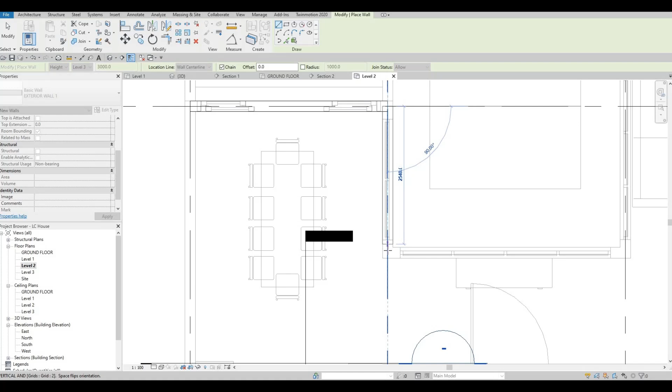And then we're going to have it all cross out right here as well. It's very easy because we're basically mimicking what we have below right now. The difference between this one is what are we going to do after we add this, because we're going to extend some of this, since we're going to add balconies in front of here.

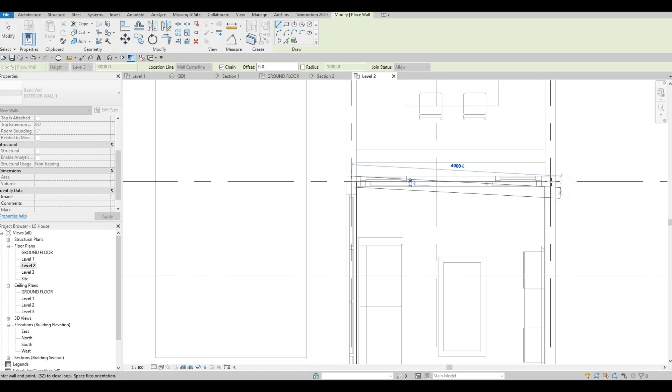So we're going to add it there, and then all the way to F5 right here. So we have our stairs right here. We're going to have it all around right here. The only difference is that once we go to F4 right here...

We need to just pull it up and type in 780. Once we do 780, we need to move this one to number 3 grid line. So basically we need some space right here.

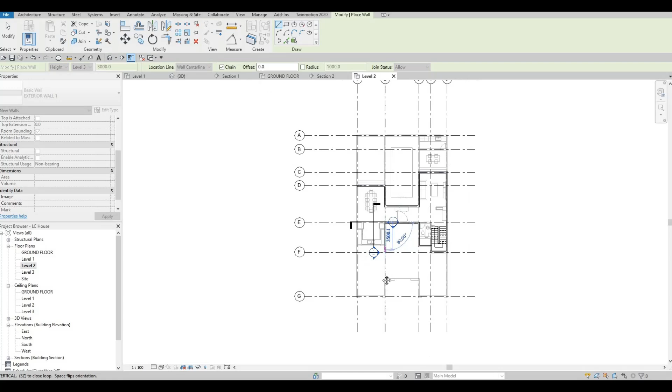And then we need to go back again right here, mimicking what we have below. So that's E3, and then going back again right here, mimicking below. And for this one, we need to go all the way to F2, then we need F1, and then here closing off to D1 again.

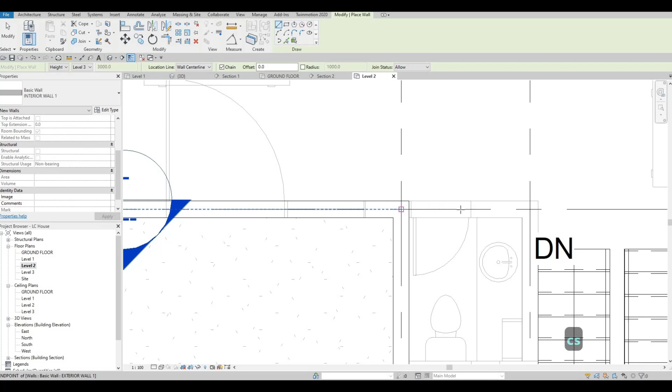So now what we're going to do is add an interior wall similar to this. We could select that below, CS, and then connect it as well right here to cover off the stairs. So here we have it, I believe right here.

So now we have, this will be a washroom, full-blown washroom. That's why we extended it a little bit, but at the same time we cover this one, and then we have a stair right here.

Again, we're going to CS on this, and then extend this one. So let's go from this endpoint to right here, this will be our master's bedroom. This will be another bedroom right here.

But at the same time, what we're going to do is add in a door right here. I'm estimating right now around 1,000 from here. So I'm going to put in 1,000 and then add it there.

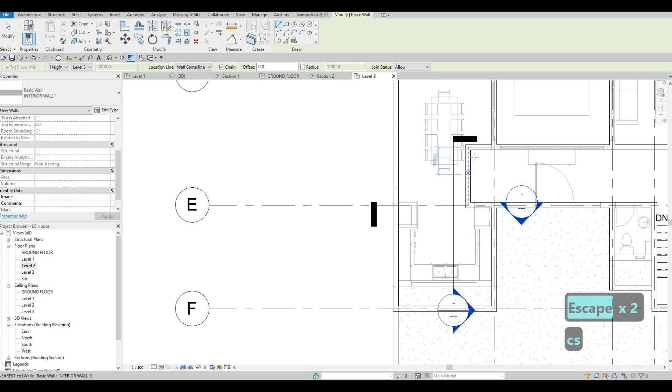Here as well, go 1,000 and add it there, and then we're going to connect them. After that, we're going to add the same one in the midpoint. So now we're basically indenting this so that it's easier for us to add in the door.

Actually, instead of 1,000, let's do 1,100. So why not add 1,100? Then here we have the door opening right here, and at least we will be able to use this area to add in our closet. So that's how it differs on that.

At the same time, now that we're adding all this stuff, why not add the toilet right here as well? So CS on that, and then add it right about here. So anything that we could add it now, even the door, so that we don't look for the other doors anymore.

So CS, we could add the door right here. Even though it's 700, we could change that to 800 or 900. But you want to maintain the 2,000.

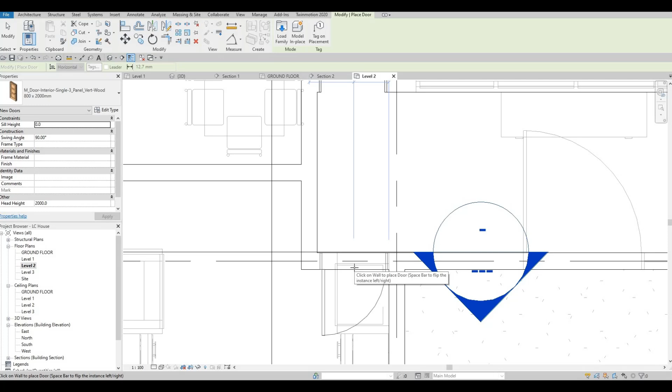So spacebar right there, and then here we could do spacebar and add it on that side. And then move this one on the other side, and then spacebar on that. So we added those stuff right there, and I believe we're good enough on this space that we don't need it anymore.

So what I'm gonna do is turn off the underlay by putting this to none and leaving it like that. So now everything makes sense. Here, CS, we're going to put this one to 700 again, similar to below, and then add it on this side.

And then after that, we're going to add the exterior wall again right here, and we're going to convert this to interior wall. So what I'm planning to do is we have the D here, and this one is just 500, so CS on that, just 500 from the top. This is what we're going to add in order to create a washroom and a walk-in closet for our master's bedroom.

So now add this wall right here. We could basically move this back right there, and then change this to interior wall, and then from interior wall CS again, and then just connect them all together again.

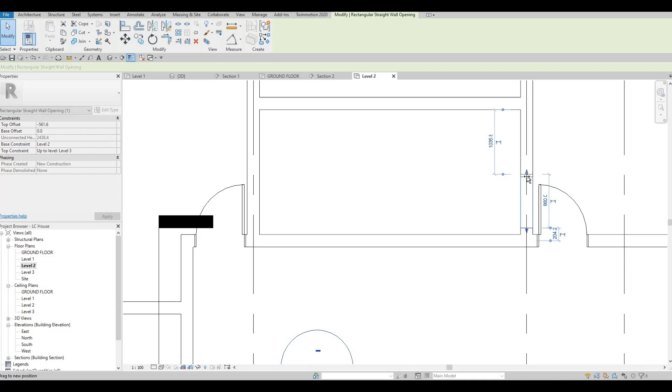And this one, it's easy to change. As you can see, you can just grab that or put in the required dimension that you want. So it's really up to you depending on the space and how you change it. It's just basically an opening for our wall, but there is still a wall there.

And now what I'm gonna do is I'm going to also add another wall inside to separate the walk-in closet from our ensuite.

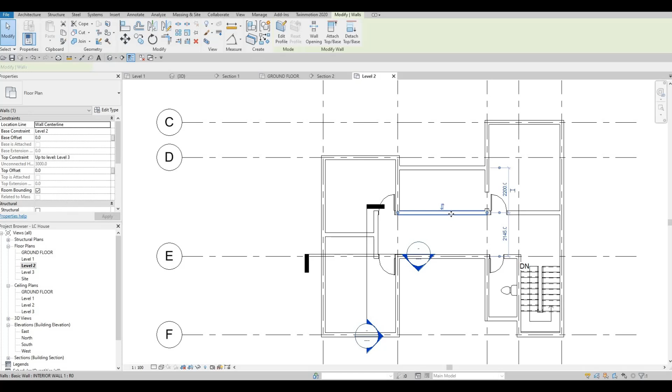So I'm going to select this wall, CS on this, and then this will be, I'm going to add it first, and then I'm going to dimension it from here. It should be around 2930. So that is the space that I needed.

So I'm going to select this one, CS, add it right here. Oh sorry, so add it right there, delete this one, and then this door, CS again, and add the door right here. But we're going to change it to 700 because that's the size of the door that we want for our washroom.

So now I'm just adding that. Hopefully you guys are envisioning what we're trying to do here. I want my toilet to have a separation, so I'm gonna add in a small wall, probably 100 thickness.

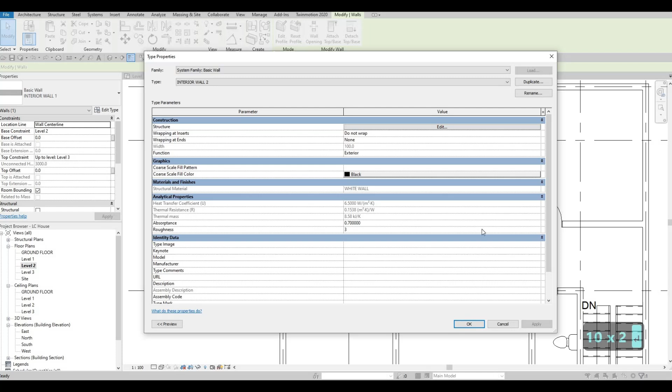So select that, edit type, duplicate. This will be wall, interior wall number 2, and then just change the thickness to 100. And at the same time, I'm just going to add it right here.

So change this one to, so I'm just gonna add that right here first, and then change this back to number 1. So just my sequence messed up there, but that's good enough.

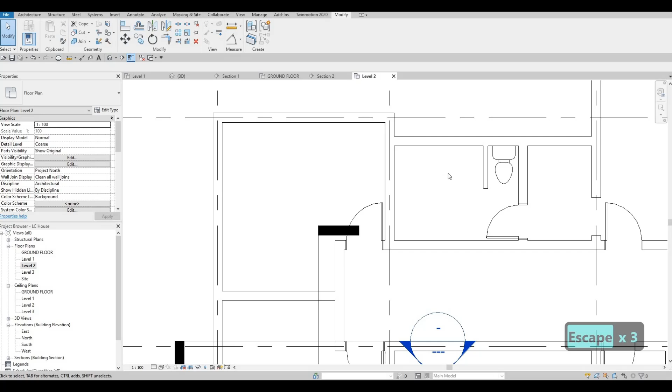And then here I'm planning to add a freestanding tub. So that will be very nice to have a freestanding tub, and I'm planning to make this one nice. And just because it's ensuite, double sink here, I'm planning to add a double sink as well. I think that will look nice to have a double sink. And then let's add in the same design that we have probably.

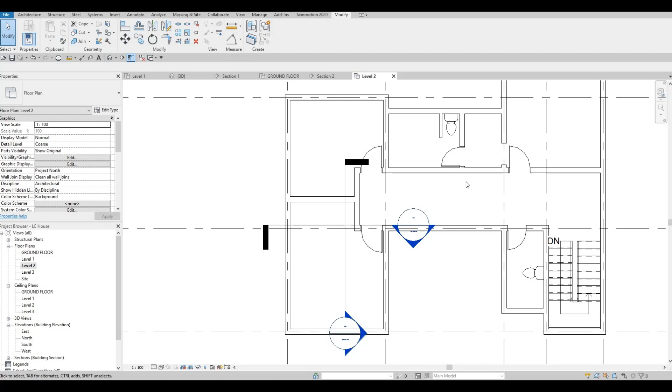So in order for us to see it much better, I'm planning to insert the bed. So let's go to insert, load family, and go back to furniture. Go to the main and look for furniture. And then we have beds here, and I usually just use this one. Click on open, CM, and then we have the bed right here, but we're going to change it to queen.

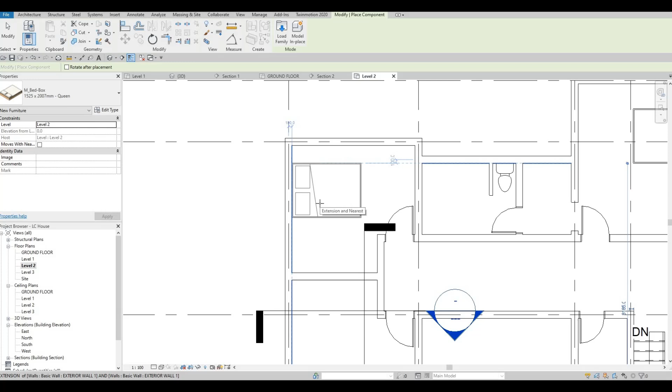So that's why I go to the drop down, and then let's add the bed like so. And then I'm just trying to add it properly and then spacing out. So this part, this will be the extra room that we have right here. I'm still thinking because we extended it too much. Maybe we could extend this one so that it's not too much of a burden for this space right here.

I'm just trying to extend a little bit of this space right here. So why not delete this first, move this back, and what I'm gonna do is select this exterior or interior wall, CS. I'm going to add it right here so that it's not too much, because I'm seeing that it's just gonna get too much space right here. So I'm gonna trim this, and then we could just extend this one right there.

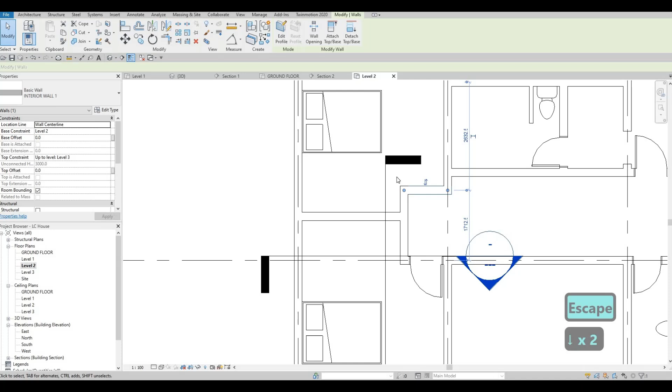That small gap here, as you can see, is giving us more space here for the closet. So I'm just adding that in order to make this one a lot better in terms of look. And then this one should be placed in the middle. I'm gonna delete that first and then add it again with the midpoint there, right there. So now they have a balance because we have more room right here, as you can see, for the closet, and then at least we've given them enough space.

And then this one will be closet. I'm gonna use this one to show as a closet. So what I do is I add it first because this is a different size or thickness. What I do is align it, AL, align it there. I'm gonna align it here as well, and then now we could just join them all together. It's a lot faster than doing something else.

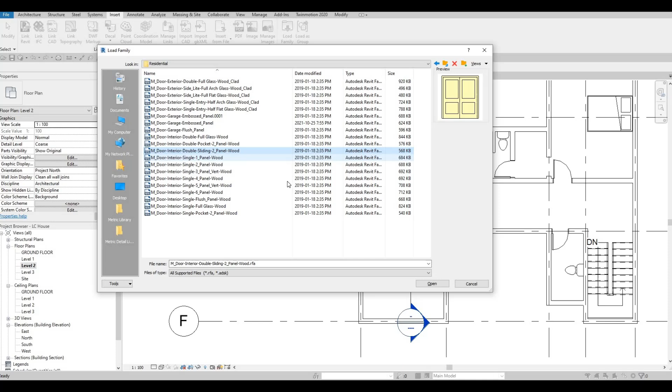So now we just need to insert as well some doors. So go back to the main and click on doors, and then for sure we have some sliding door right here that we used before. So here I'm gonna use sliding door right there. I'm gonna load everything because I want all the variation that we could have, and then type in DR. The smallest one is the one that is appearing right now. Maybe we could put the 1700 first. 1700 is good enough, and then let's just add it right there.

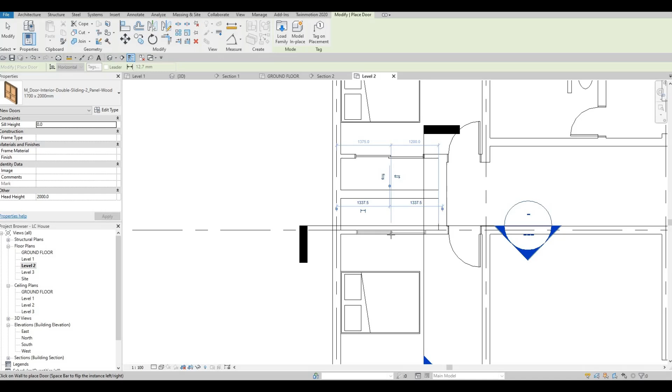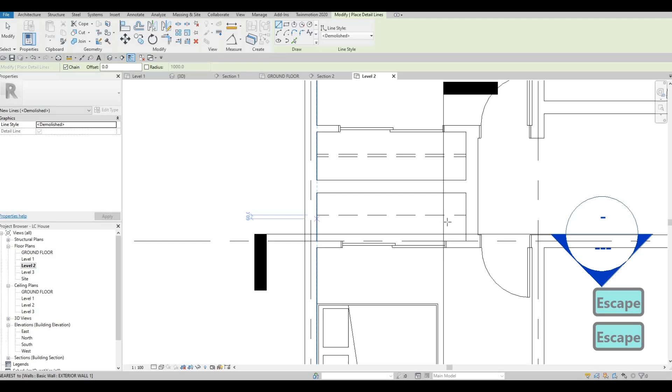To showcase the rod, we need annotation, and then we need the demolish line because we don't have dash line at the moment here. And then just add that demolish line to represent the rod, and then the shelvings as well. And then here we could have an entertainment system, like TV and whatnot, and then we could have this one as well right here. So that will look nice.

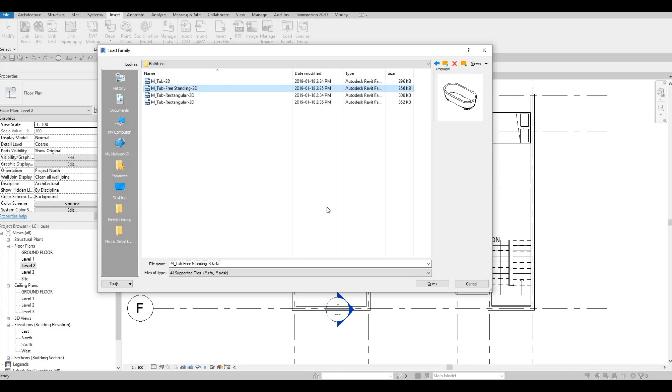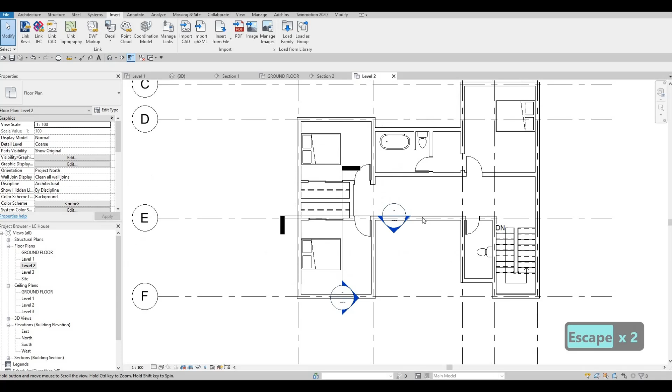In terms of the tub and then the sink right here, what I'm gonna do is I'm going to insert the tub first so that everything looks proper here. Plumbing, architecture, fixture, we have bathtub, we have freestanding here, so let's add that first. CM, and then that looks perfect right there. And what I'm planning to do is give it some nice window right here so that it's overlooking, and obviously there's gonna be some privacy there, and then we're going to have a nice window here as well. So I'm planning to add a nice window here.

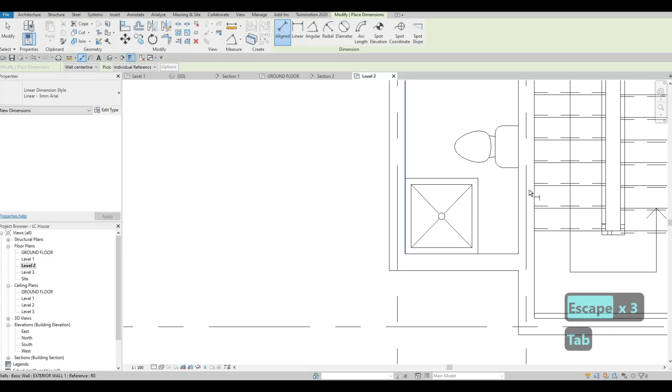And then in terms of the shower, we're just going to use this shower for now. We're just using this one anyway, so we're going to add this one. Click on dimension to know the dimension of the inside right here, 1420, and then edit this one. You can duplicate it if you want to, and then 1420 on one of them.

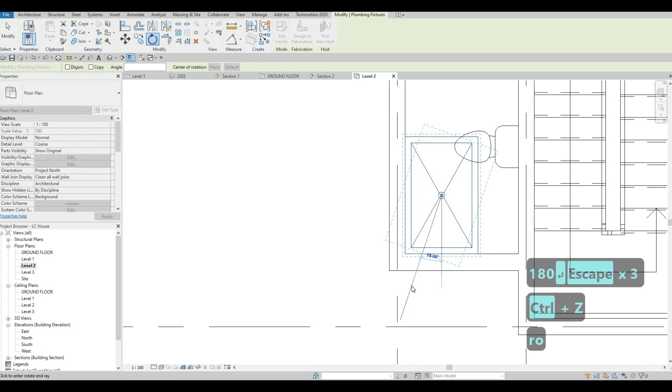Maybe it's the width or the, so depending on that, you could just rotate this one 90 degrees, not 180. And then after that, you could just grab it, move it, MV, and then move it from the corner. So that will be perfectly fit there.

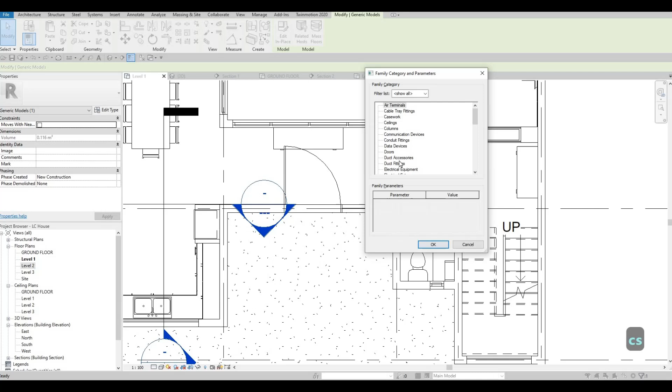And then the sink, because we did the sink right here, as you can know, we have our extrusion. If we see that, basically this right here is not an annotation, but we really built this. It's up to us if we want to add the same thing right here or change it a little bit. But knowing that I showed it to you, why not just add the detail line?

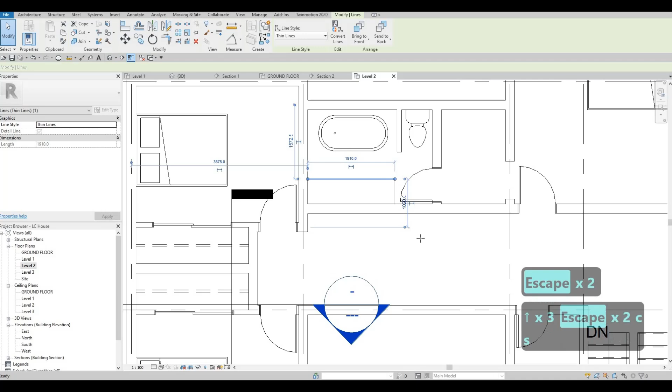So we're gonna use thin line just to represent the top there. Not the line, but thin line is much better. And then obviously that's too much. We could just change it like that, eyeball it, and then add in the sink, the same sink that we have below, to represent that.

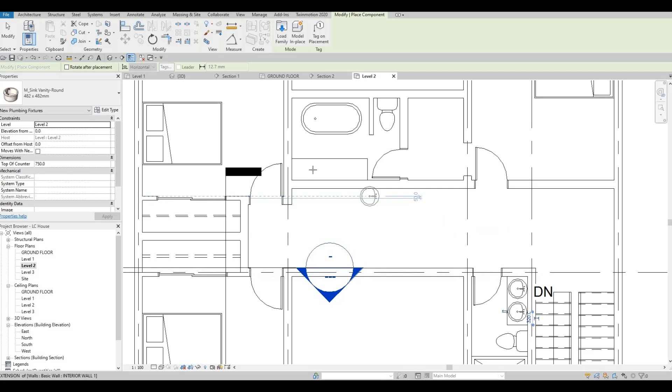I'm gonna go here and then CS on that, and then add it right here to sink as well. Why not? Because two of this room will use one of this one, and then obviously the master will have its own. So now it will look like that. And then I want to showcase something right here as well.

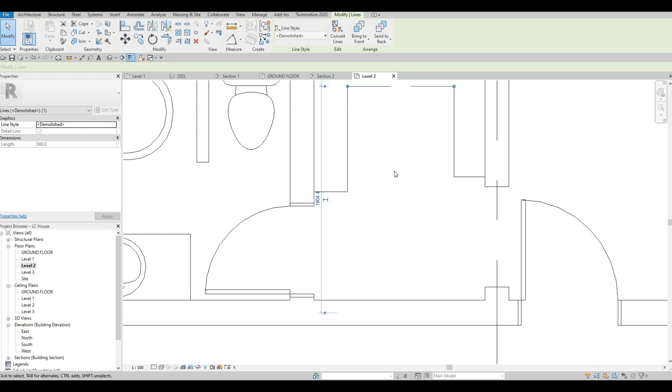So I'm going to use detail line, thin line first to do a U shape right here. And then after that, let's change this to demolished line and then add, sorry, undo that, and then add a demolished line again all around. We can even offset this so that it's easier for everyone. Let's put 50.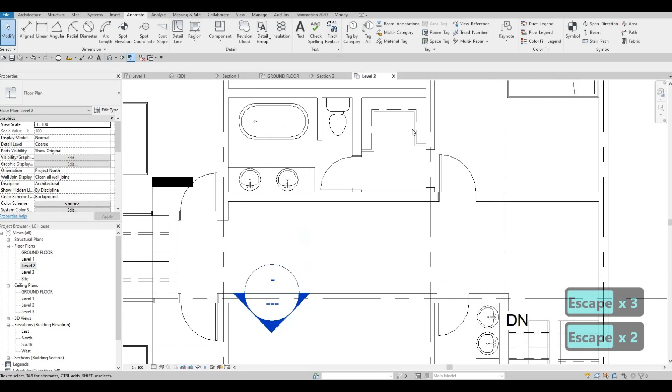And then use trim and extend to trim everything else. So I'm happy with what we have here. Select those parts and just leave it like that. And then we could just move it like that and then have it like that. I think that is looking good right now. I'm just gonna double check what it looks like right now.

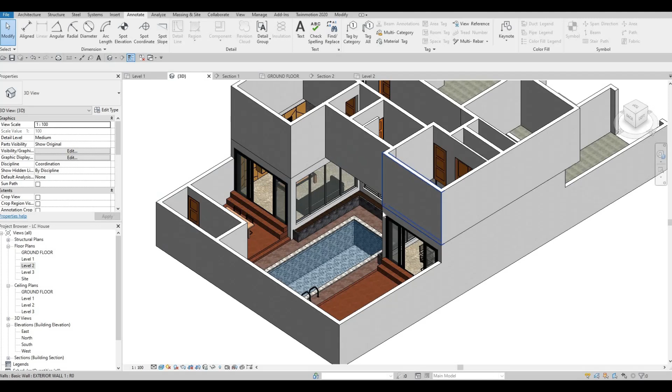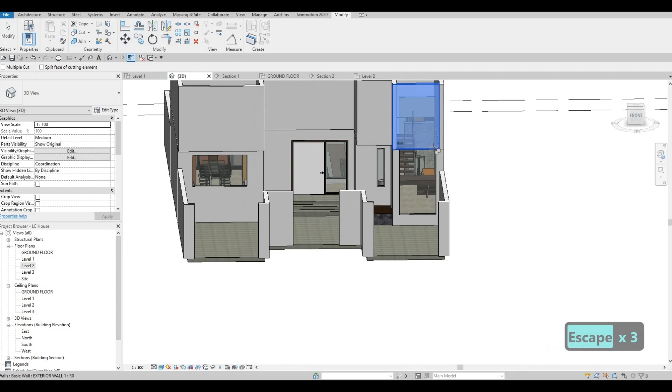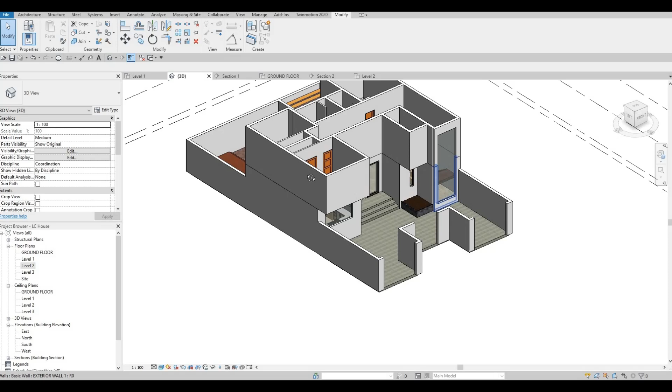So actually, because we have the wall right there, we could just add it there and then use cut geometry now, and it will cut it as well. And as you can see, one big one, and it's overlooking, and then we could just design it a little bit. So that's what I'm planning to do, design it a little bit. You could use a vertical, and then the horizontal is singular, and it will be random on all of it. That's looking good.

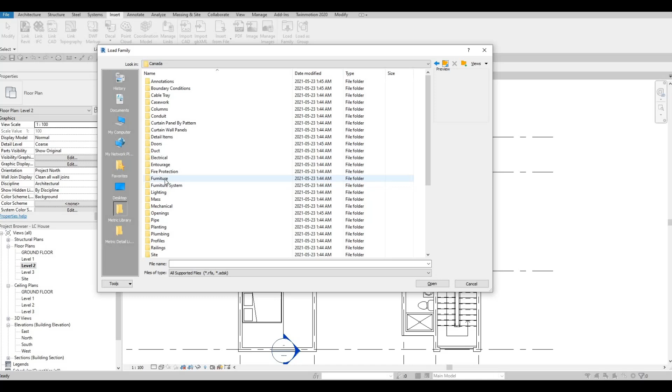Let's go back to level 2, and then let's add. So let's insert load family. Let's add some side table to make it look nicer here. So we'll need furniture, table, and then let's add in a nightstand table, CM. Then let's add it on all ends like so. So we're adding it right there.

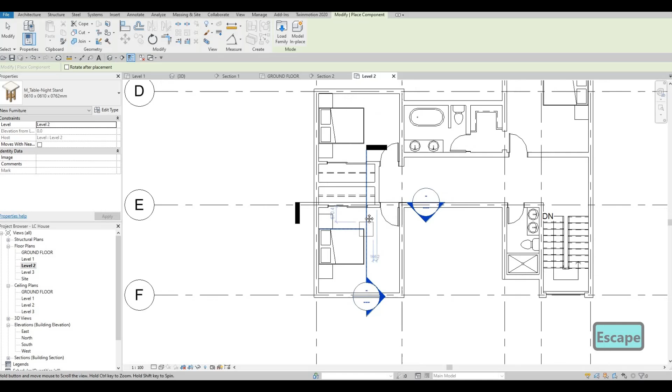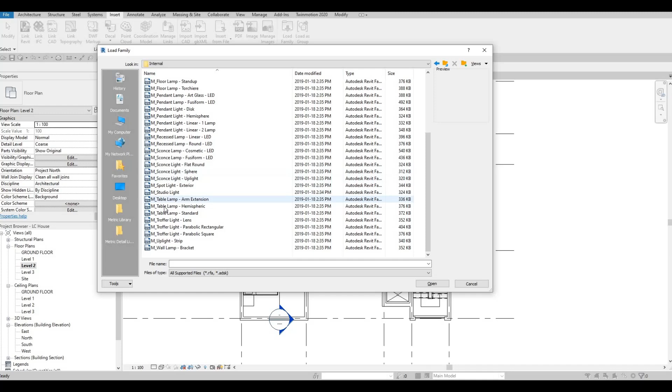And then we could add in a lighting on the side. So let's add in the lighting. So let's go to insert and then load family, and then go back here and look for lighting, architecture, and then internal. And then let's look for a table lamp. So this one should be good enough. And then CM, add it right here. But we need to double check that because it's not on the proper level.

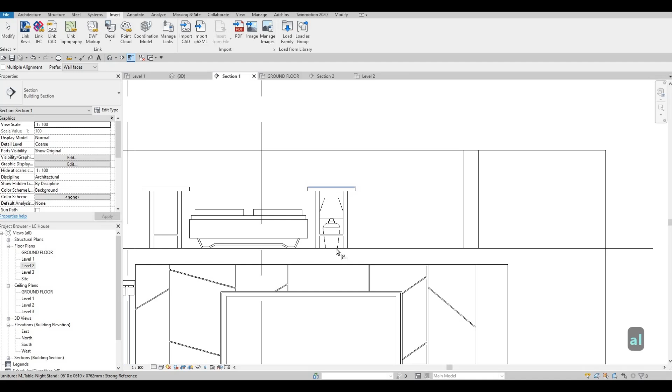So what we're gonna do is double click here and then go up there. What we can do now is AL, and then AL there. So now it will put it in the proper height. So it will be 762 from the elevation.